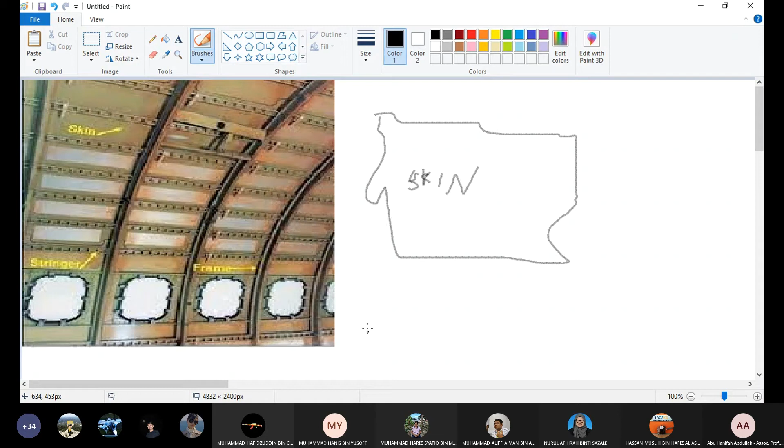And we have frame. Frame is the makeup of: we have angle piece, we have skin, and we have another angle, and we have web.

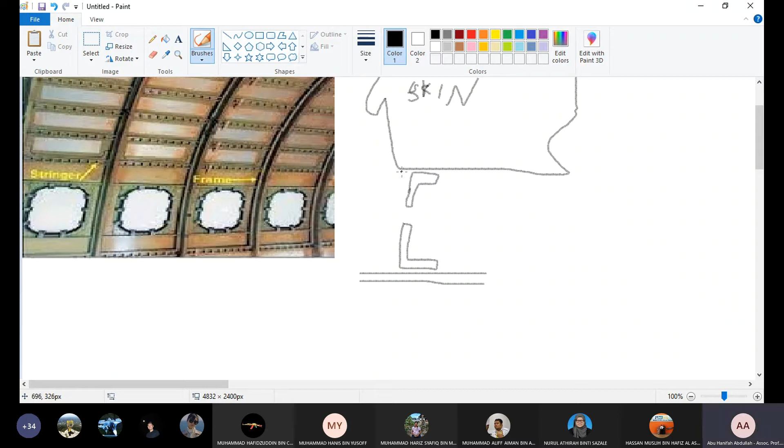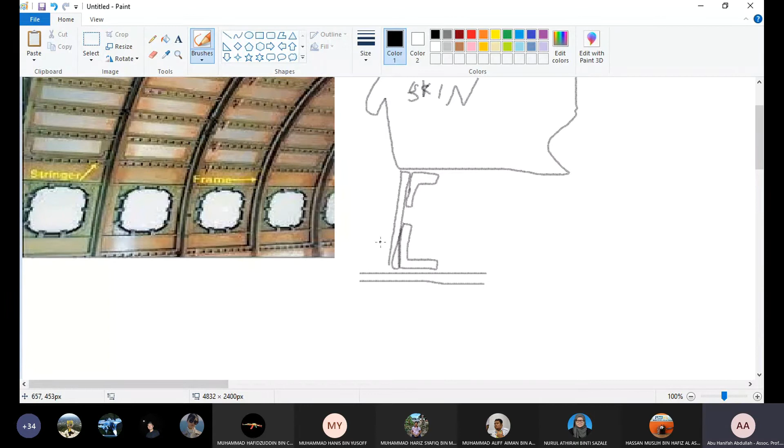And rivet together, rivet together to the skin. So the whole thing here is considered as frame. So this is frame construction.

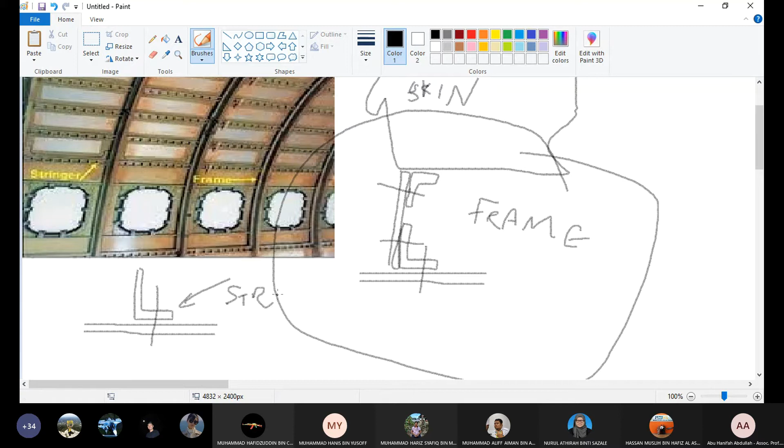And we may have just a simple angle. This is skin, and we have a simple angle, and we have rivets. So this is stringer. Yeah, so this is basic construction of aircraft structure.

Is this recorded? Okay, recorded.

Okay, so this is what we have typically. We do not have other concept. We don't have any other design. This is basic design of the aircraft structure. You can see here, this is a picture of part of the aircraft structure. So you can see most of the construction, all the construction.

Either we have frame, so the big massive structure here is frame. We have the stringer. So the frame is just like, then we have the skin wrapped around it, and all the skin will be riveted to the stringer and part of the frame.

Frame is basically a construction of either pieces of L angle, two pieces of L angle, and we have web that attach them together, or we may have one big piece which is machined. You may have a machined piece, one big piece, machined off. So that's also another construction of the frame.

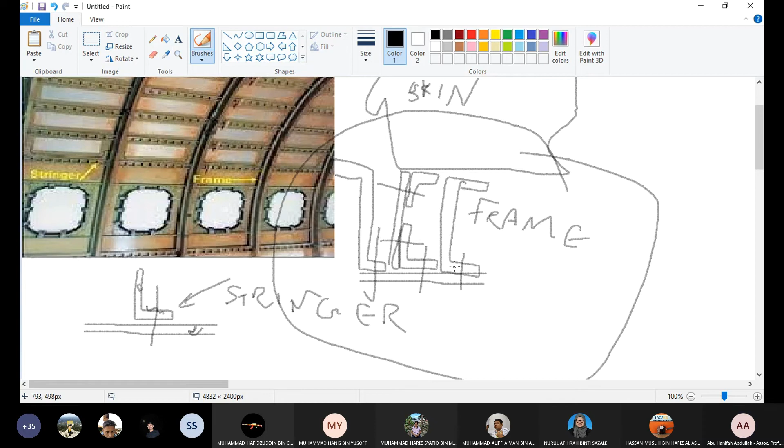And these pieces as a structure tend to get damaged. We may have damaged the skin itself. We may have damaged the flange. We have vertical flange, horizontal flange. You may also damage part of the frame. So because the typical construction is a frame and a skin, the majority of repair will be just splicing or doubler over the frame, over the section angle.

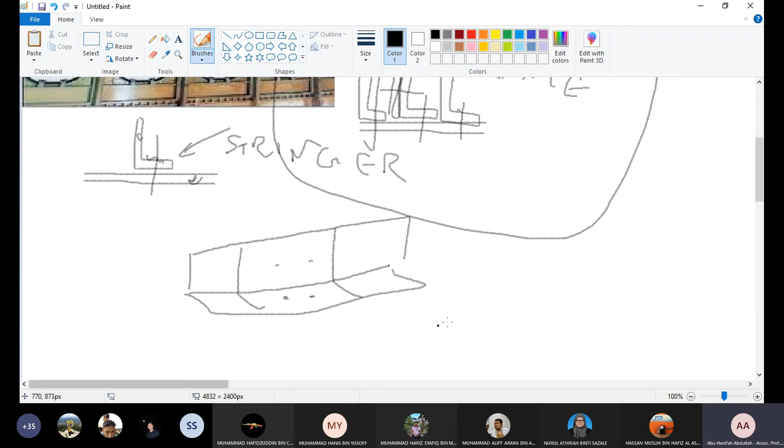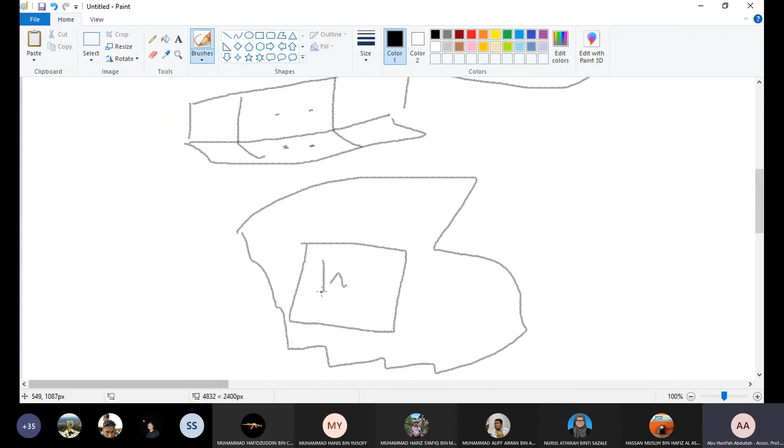So we have splice, doubler, or we have a skin. Say this part of skin. We have damage here, and we have a doubler repair. After we cut the damage off, then we put rivets all over. So typical repair is only two.

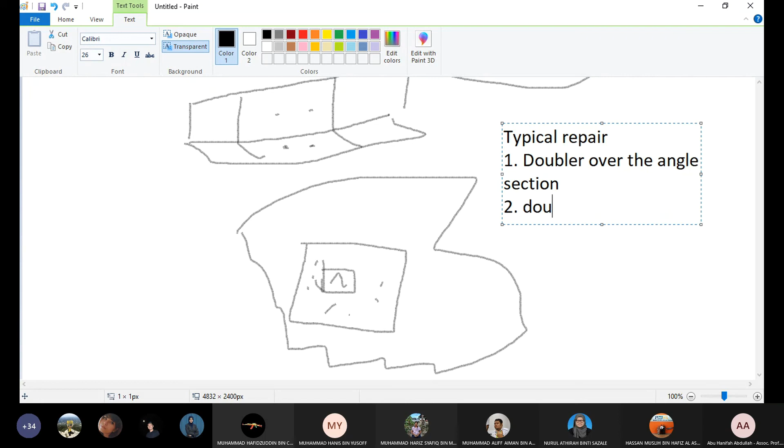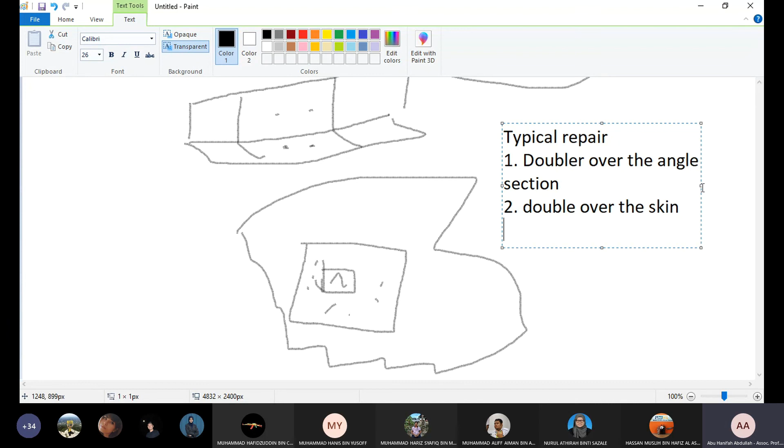So either we have doubler over the angle section and doubler over the skin. So those are the typical repairs of the aircraft structure based on their common typical construction. You may have a doubler angle, or you may splice the whole section. Or doubler repair.

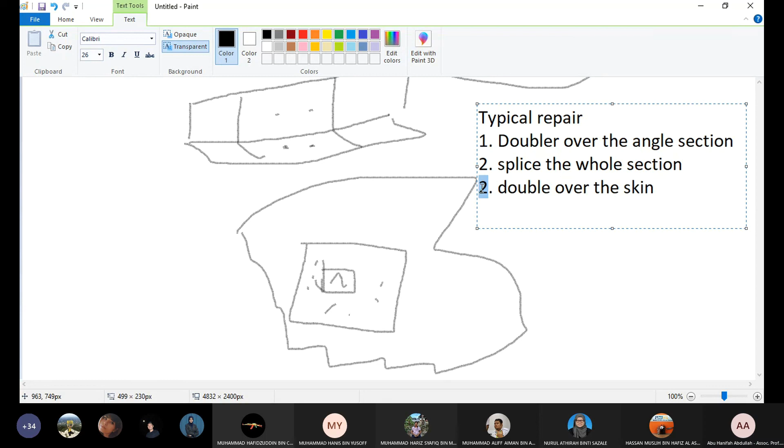Okay. Anyone with a question?